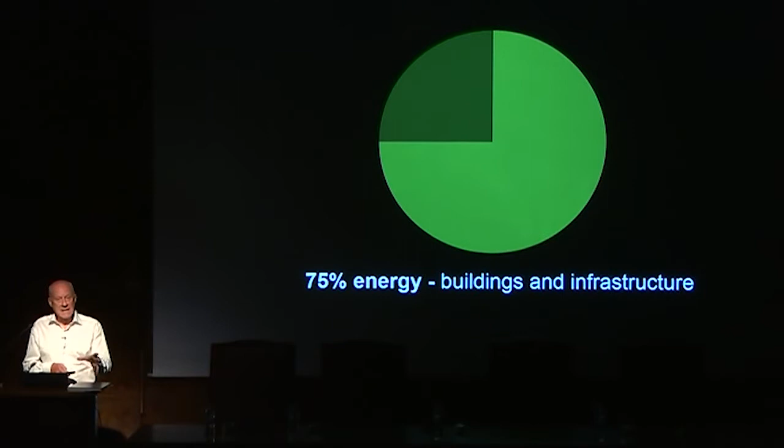So that puts simply the buildings and the movement of people and goods between those buildings. If we put the rate of urbanization into a European context, we're right in the middle of an explosion of urbanization just in China—that's the equivalent of 1 Madrid every 2 months for 6 years, just to put it into context.

And the pollution that follows from that—if you take a foggy, smoggy day in Beijing, that is the equivalent of smoking 1 pack of cigarettes in terms of health impact. Sometimes I show a very similar image of 1952 London, which claimed 12,000 lives, and that was cleared up by the political act of the Clean Air Act of 1956.

At that point in time, a small island didn't impact the global entity. But the scale of pollution now is such that in a shared world it affects everybody. It's not just national or local—it is total, global in terms of its impact.

If we look at the top and the kind of frozen waste, the polar areas, as those melt, the polar bear sitting on top of that melting mass of ice seems far away—it's not going to bother us, or is it? Because if you consider that 75% of the world's cities are on a coastline and 50% of the world population is within 100 kilometers of the coast, then really it is a catastrophe.

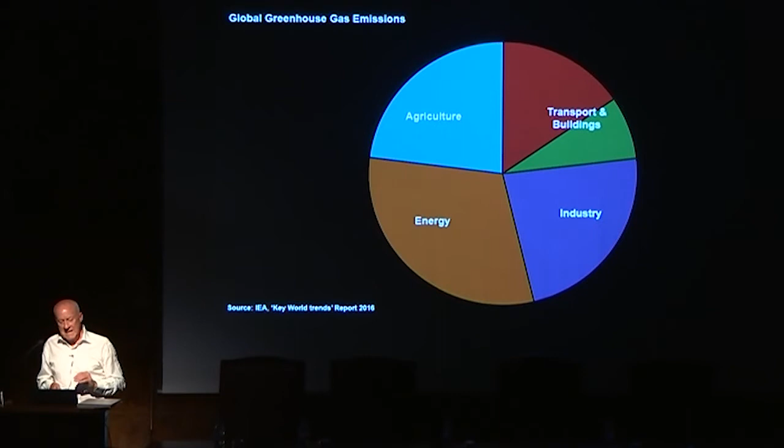The production of energy is one high generator. Agriculture, interestingly, is a very big generator, and largely ignored, with tremendous potential for change. So if we look at these elements, we have to produce energy more cleanly, and we have to produce more energy than we're consuming at the moment, if we want to address the needs of those 25% of humanity who don't have the ability to press a switch and get lights and projections.

At the same time, agriculture, and I'll come back to that later, but probably of more immediate concern to those of us in this space here, the implication of buildings, connections, infrastructure.

Looking at one example as a city typology, take the car-hungry, consuming Western United States, California. This image on the left is very typical of what you would find when I had my first meeting with Steve Jobs about his project, on the 1st of September 2009. In that conversation, he harked back to his youth, his childhood, and the fact that this area was the fruit bowl of the United States, and a demonstration of extraordinary rate of change in terms of technology, because this is now the generator of wealth, the Silicon Valley that we all take for granted.

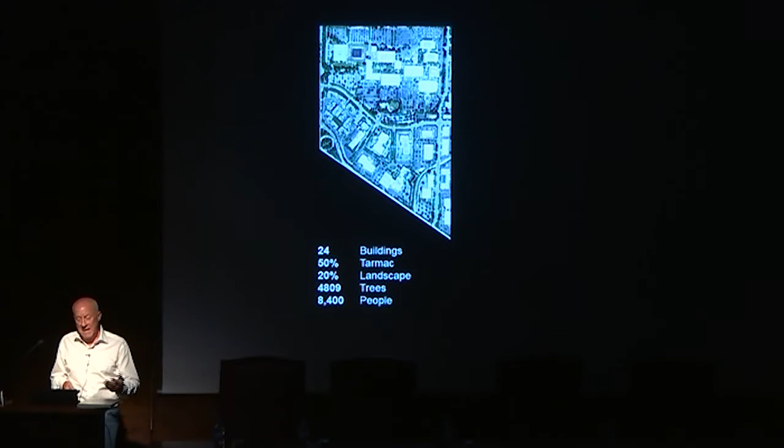So how could one weave some of these themes in terms of reducing pollution, working with nature, bringing back nature? If we look at his site, on a kind of typical highway that I showed before, it's a lot of buildings with a lot of asphalt, a lot of car parks, no landscaping, making a big leap into where we are now over that period of some 8 years. And this is the end result.

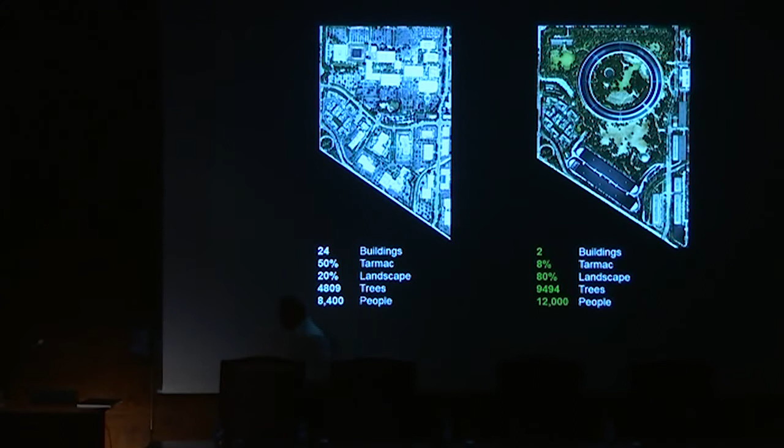The first thing that you see is there's a lot of green. It's really going back to the fruit bowl of Steve Jobs' youth. I'm just going to touch briefly on the larger building, and what you may see is the smaller circular building just below here, the big building, which is the kind of launch pad that was the venue for the product launch a few weeks ago.

So if we look at the big circular building and we see these eyebrows, if we look into the junction between those big sheets of curved glass and the kind of eyebrows that come out that deflect the light deep into the building, shade it on some elevations, then we start to see the way in which this building breathes. It's really working with the climate.

For some 80% of the year, you don't have to cool or heat the air. Of course, you have the capability of doing that in the extreme. So this building is a fresher, more healthier building. It's consuming less energy. And at the same time, the scale of the greenery - remember that the building harvests its own energy, so it's totally carbon-free and totally self-sufficient. But the greenery is absorbing something like 2,000 tons of carbon dioxide, which is a neighborhood benefit for the area.

The launch of the product, the first building that was open to the press, and therefore, by implication, the public, is the circular presentation theatre, the Steve Jobs Theatre.

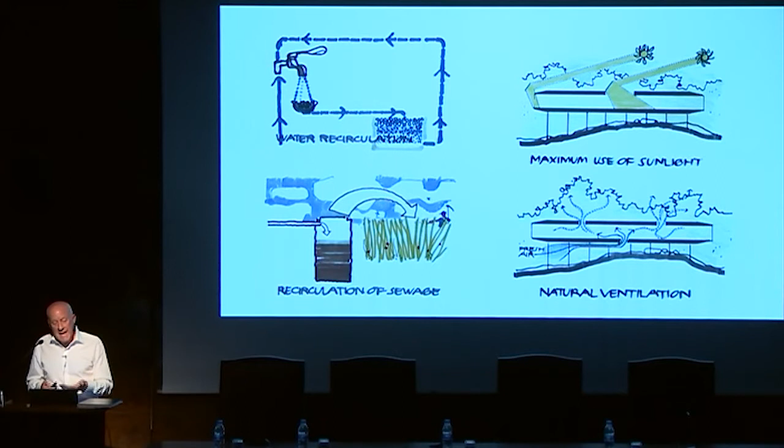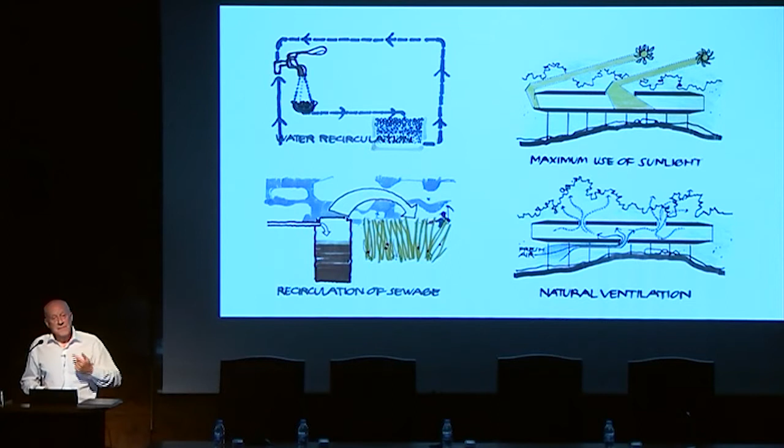As I delved deeper into it from the drawings of the past, I realized that this was in the 70s, before anybody had invented the term green architecture. This was about recycling, natural light, and a breathing building, bringing the air from below, from the cool forest floor. And it suddenly clicked that that was the clue to the reinvention of the airport at Stansted.

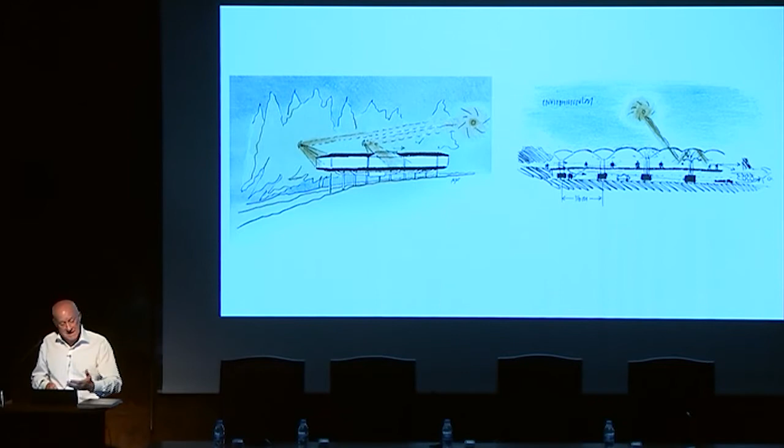If you just look at these two cross-section sketches, I realized it was the same engineer, who was an integral part of the design team, who'd come up with this idea that you could service from below. It started with this project in the forest in Norway, and informed how you would reinvent this. This was the airport terminal at Heathrow, typical of any terminal in the early 1990s, where the roof is absolutely solid, jam-packed with mechanical equipment.

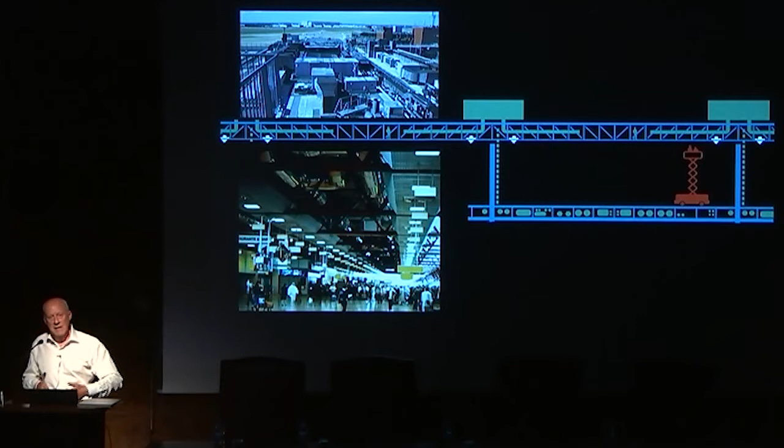Here you get working together with an engineer to zap the engineering, to get it out of the way. If you turn this diagram upside down and put all that heavy servicing on the ground, first of all it's more economic to put heavy stuff on the ground rather than up on a roof. Secondly, for an operation that runs every day of the year, 24 hours, you need to be able to maintain it without stopping the action on the roof or underneath. In the process, you bring more joy, more spiritual uplift, and you use less energy.

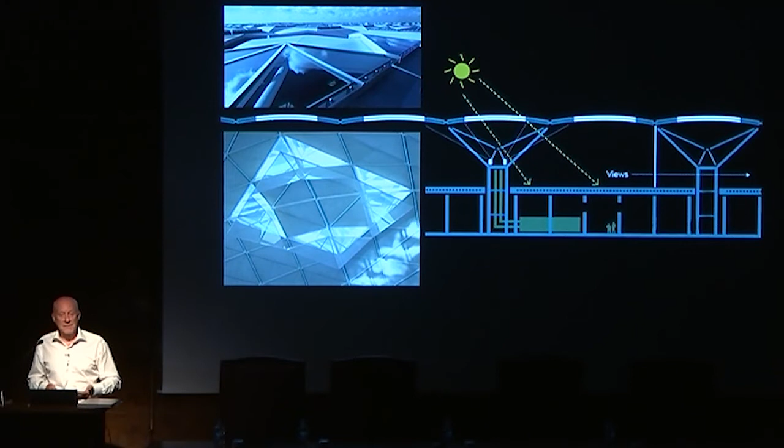You're working with nature. That was a kind of revolutionary move at Stansted, and in effect it reinvented the terminal as we know it. But you can only, as an architect, make those revolutionary moves quite rarely. They occur at points, and then you spend a large amount of time refining that model, which is a kind of evolutionary process.

So Hong Kong Airport could not have happened without Stansted. It's a development of that model, and then an increase in scale in Beijing. But they're all evolutionary. They're building on that big step that happened way, way back 20 years earlier.

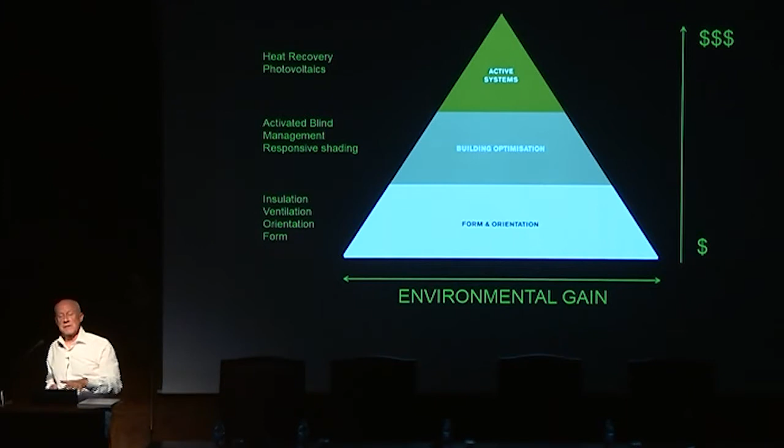But if you got the base decisions right—and on Masdar, that would be learning from an age before we even had power and electricity—in other words, how did a desert tribe create an architecture in an age before power and electricity, just using thermal mass, shading, vegetation, and water to make beautiful, cooler habitations. If you applied those lessons in an experiment like Masdar, you could achieve a high-quality environment with a small input of that extra energy at the top.

If that's true of a building, it's also even more true of the combination of buildings and infrastructure, in other words, cities. So you could say that simplistically, there are three kinds of cities.

There is a very strong relationship between the form of the city, its dependency on the car, and its density to sustainability in terms of the amount of energy consumed. The equivalent of the gas guzzler is the sprawl, the car-borne city, which is a relatively new invention and is already being called into question. The ideal model, rooted in the past, is Madrid, but it could be London, it could be Boston, and taken to an extreme in terms of high density, Manhattan, where the highest proportion of individuals can walk to work from their dwelling or arrive by public transport. So it's very much about proximity.

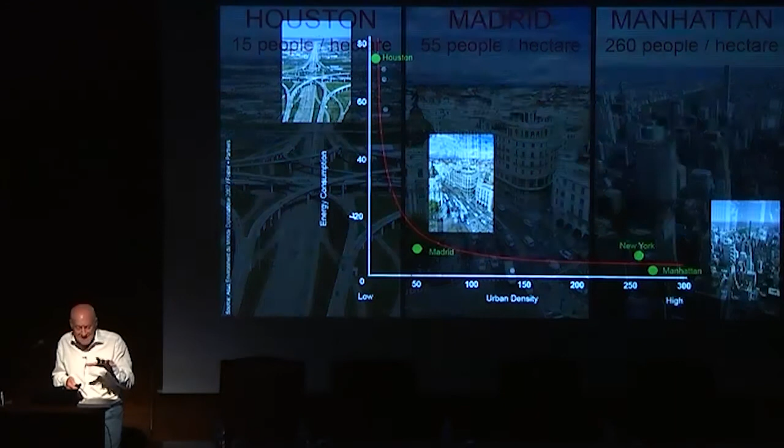If we put those onto a graph to demonstrate statistically the relationship, energy consumption is the vertical line. At the top, you're consuming a huge amount of energy. The bottom line is density - low density, high consumption. Madrid, London, whatever, comfortably in the middle, high performers, and then New York and Manhattan, but Manhattan could be Hong Kong, it could be Asian cities. So really, essentially, those three typologies.

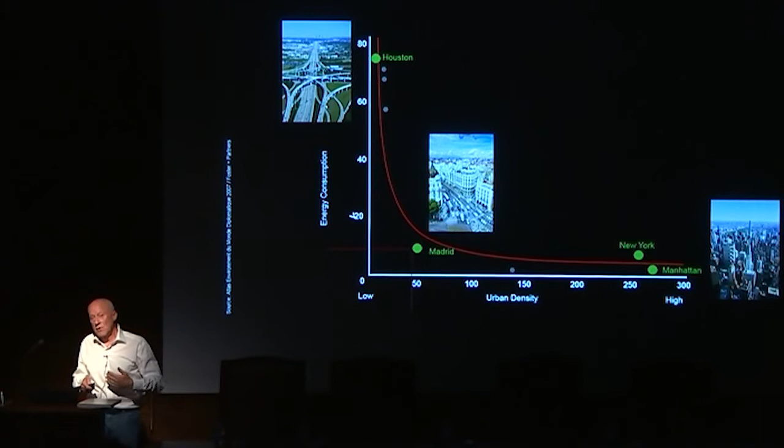You would have thought that if that was the reality, then when you had an opportunity in terms of the current rate of urbanization, you would learn those lessons of history. That is interesting because those lessons are being learned in one part of the globe and largely ignored in another. If you look at Dubai in 1991, which is relatively close, then this is Dubai now - it is the Houston model, this is what it's looking like. So whilst the new urbanizations are going in this direction, what is happening to the rest of the world who've gone in this direction and learnt those lessons?

If you take Boston, this freeway was built in 1959. In 1995, it was decided that it wasn't really doing its job, so it was ripped up, giving rise to the Big Dig. The Big Dig has produced a neighborhood where crime is lower, real estate values are higher, and the quality of urban life is significantly improved.

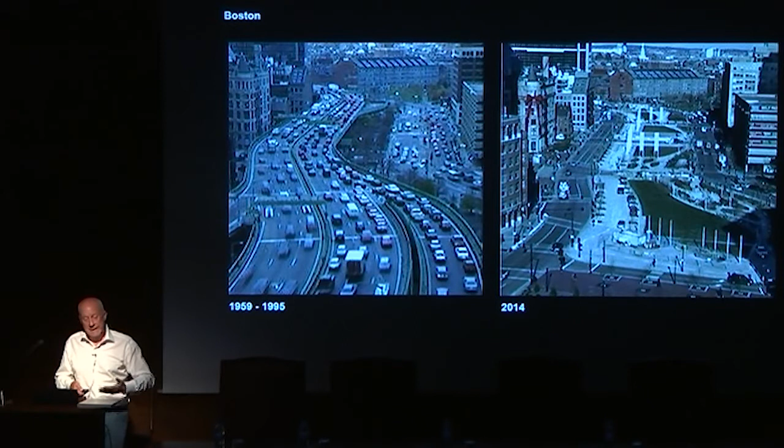If you go to Asia and look at Seoul, they buried a river in 1956 in concrete, and then in 2014 they took it all away and brought back the river. And even here in Madrid, in 1960 a road was built next to it - now it's a pedestrian experience.

So in a way, there's a huge gap here and a need to feed those lessons from one part of society to another emerging part of society.

Interestingly, this is happening at a point in time with the transportation revolution, whether that's Uber or the automated car. What does the automated car do when it has the potential to produce a train, where the car can be nose to tail with the next car, flowing in a line? And to what extent does that challenge some of the assertions I made about suburbia? It has the power to totally transform mobility as we know it.

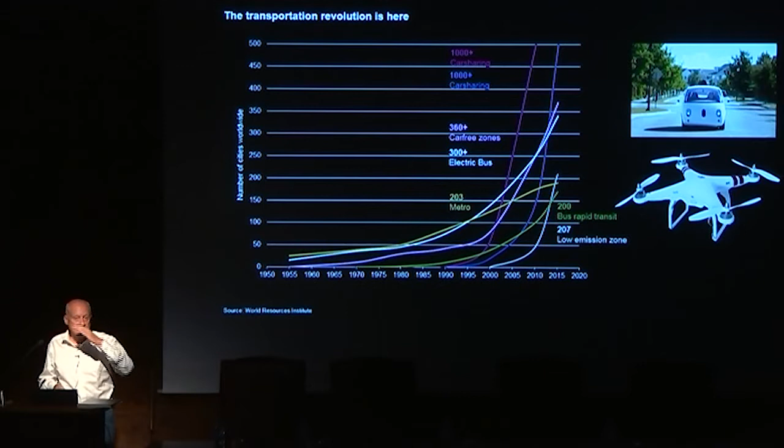Already the drone is a fact of life in terms of recreation and photography - we've all been able to follow the progress of Apple's site by drone fanatics who fly over and capture it. But when those become passenger-carrying drones, look at some of the Airbus explorations, where you could have horizontal and vertical mobility. So really the challenge is doing more for less, and performance.

What are the lessons from this that need to be fed into the wider picture of societies? Coming back to that point about power and electricity, as a reminder, a quarter of the planet's population doesn't have access to that power. What are the lessons we might learn from the world of communications in terms of addressing these issues?

This is in Rio, and literally one side of that wall is the equivalent of here. The other side of that wall, the next image - not in that favela itself, but it could be - shows this extraordinary ad hoc plugging into power transmission.

In a way, already perhaps that concept of transmission is being questioned—the idea that we have to move energy by cables. We've demonstrated in the Masdar experiment that a solar field below of 10 megawatts can power a very energy-intensive university exploring renewable energy 24/7, without any mains transmission. And perhaps by miniaturizing, snipping pieces of that very large solar field and distributing them locally through rural communities, you could provide the quality of life that the city offers in rural areas, reducing the flow to the cities and getting a more balanced approach, as well as improving quality of life.

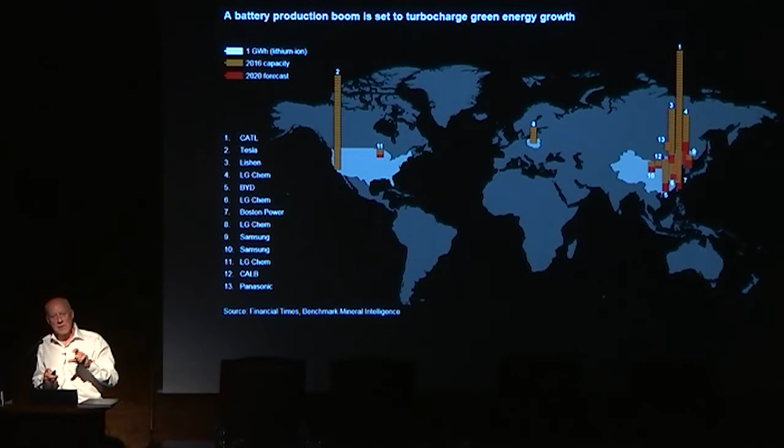In a way, you cannot separate the issue of solar from the problems it poses, because when you most want that energy, the sun isn't shining, most likely. So that is related to investment in battery production and increasing the performance of batteries.

It's common knowledge that the biggest investment is Elon Musk's Tesla in Nevada, shown on the left. But by comparison, you can see the biggest investor is China—that's where all the effort and research is going into a greener future.

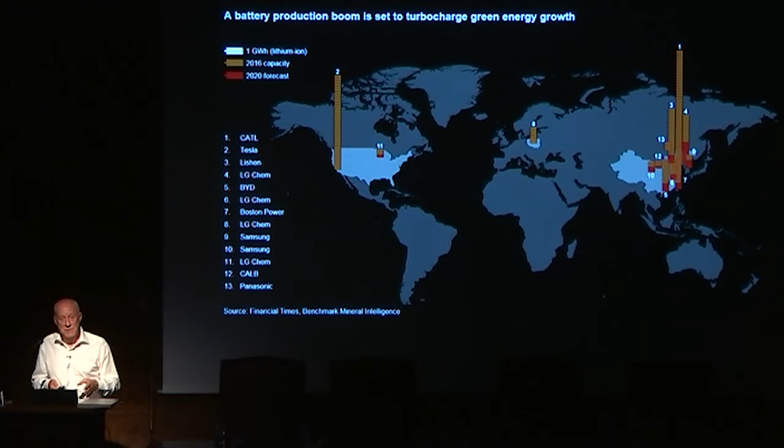What happens when it all goes red? That's an interesting question. The answer is that, in terms of efficiency versus consumption, we have to do more with less. So what are the lessons from other fields? Maybe we don't have to have heavy transmission lines—maybe we can work locally, harvesting energy instead of relying on mega plants that distribute it.

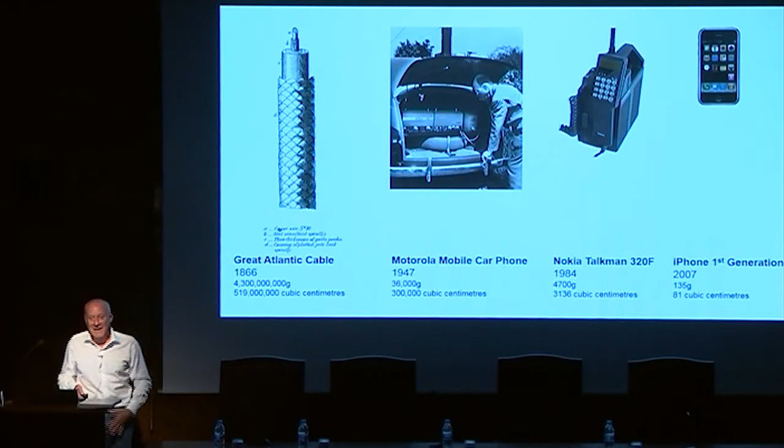If we look at the Great Atlantic Cable from the 19th century, which weighed billions of grams, and fast forward to 1947, you can see all that capability fits in the trunk of a car. Then there's the Nokia, and looking at the date, it's 1984—I remember being one of the first people in London to have a mobile phone, carrying it proudly into meetings and putting it on the table. Now the handheld device in my pocket does more than a room full of that stuff, not that long ago, within living memory.

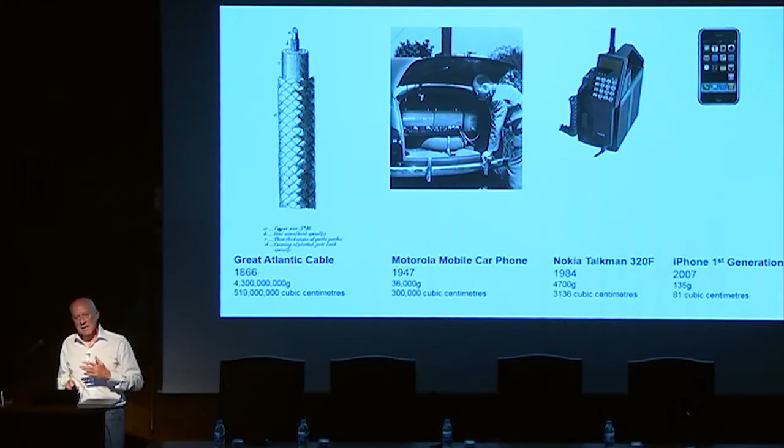So the hope is that if those lessons are fed back into some of the issues in the world I've described, we can really seek to do more with less, using ingenuity.

I find it tremendously encouraging that in an ideal world with developed transport infrastructure, the Metro Bilbao can really go underground. But for some communities, they will never have that luxury, certainly not in an emerging phase of development—and to do this is at least 30 times more expensive than just building a highway.

But Bogota, with an incredible mayor and political leadership—who also had a background as an architect—decided that if you combined the bus, the highway, and the lessons of mass transit, you could issue tickets earlier, give dedicated lines, and redesign the relationship between a platform, a bus shelter, and the movement onto the buses.

That initiative reduced traffic fatalities in a measurable period by 93%, cut air pollution by 40%, shortened commuting times by 32%, achieved overwhelming acceptance, and moved something like nearly 2.2 million people a day.

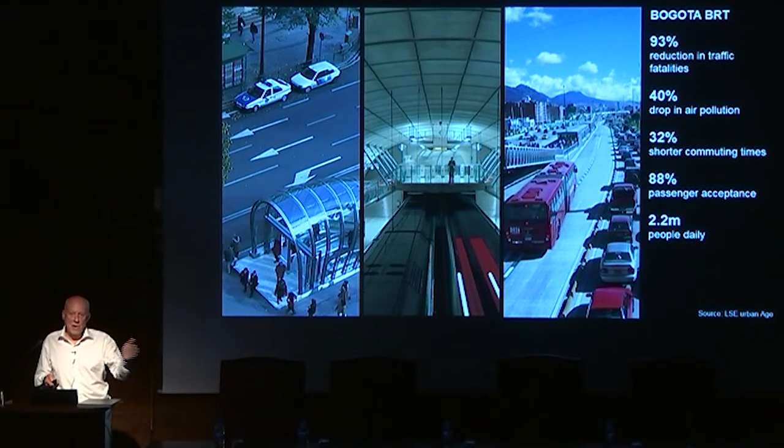To try and sum up, we have to move as communities. There's a very interesting book, so interesting that I organized for every individual in the practice to have a copy. It's called A Climate of Hope, by a friend who started as a client, Mike Bloomberg, who with Carl Pope, head of the Sierra Club, wrote this book.

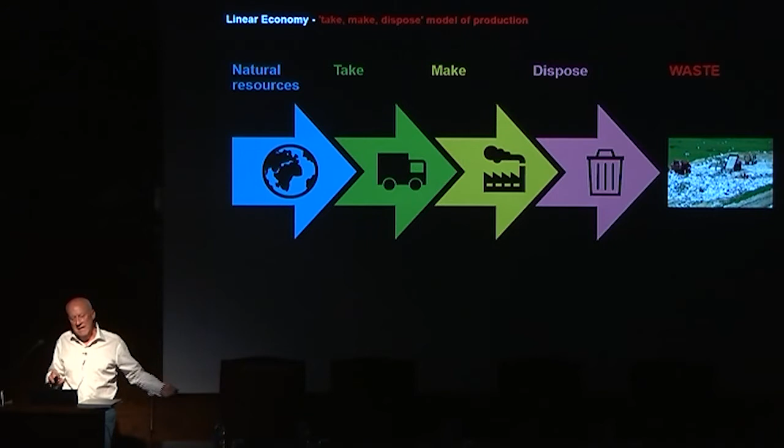The thesis of the book is that we cannot wait for governments—they take too long. We have to move as cities, civic leaders, and citizens, individuals. The move has to be from a linear economy, whether national or city-based, away from the idea that we bring stuff in, consume it, and spew it out as waste, to something much more circular.

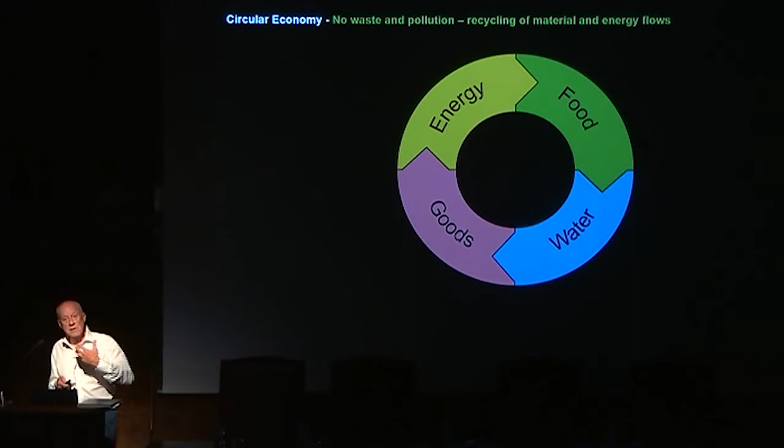We have to look at the relationship between waste and energy, the idea that you can burn the waste to produce energy, and the whole question of agriculture. Think about the traffic revolution, the move to electric cars, already a fact, already in legislation in India, in London, in various countries—the end of the internal combustion engine for cars will linger but it may transform. Once you do that, you take away the byproduct, which are fertilizers.

So why, in that scenario, would you ever think about agriculture being out there in the middle of nowhere? Because there's no fertilizer any longer, and you have to move all the water out there, which is going to be a very precious commodity indeed. When you're in the city, what do you have? You have all the waste, which is fertilizer, and the water that goes with it.

So you could imagine—here we're seeing hydroponics. It's a vertical farm, an urban farm. With hydroponics, for the same area you can get 13 times the yield while consuming less than one-tenth of the water needed, so you're conserving water. I think there are some very exciting developments. In that sense, we called it 'The Future is Now.' You can already see those symptoms.

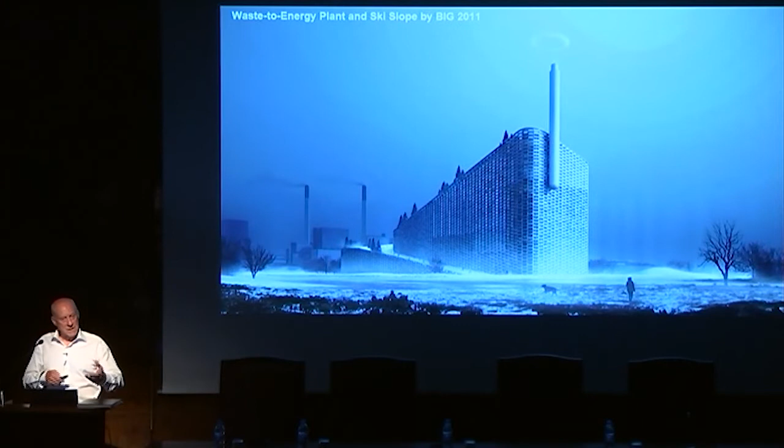And here, again, by Architects BIG, the idea that a waste-to-energy plant becomes a ski slope—looking holistically at the relationship between activities.

So finally, cities can change the world for good, and small changes can make huge differences, and the answer has to be design and technology. If technology got us into some of the messes we've been in in the past, it's technology that's going to get us out of it.

It's interesting—at the end of the 19th century, London and New York were going under in horse manure from horse-drawn traffic. You had the equivalent of the two-seater cab, the hansom cab, and the equivalent of trucks, the buses—all horse-drawn. The two cities were literally going under in waste. Within a decade, the cities were clean. Still traffic jams, but the saviors were Henry Ford and Benz, the motor car. So the motor car, now questioned in many ways as the enemy, was the savior at the end of the 19th century.

So it is this idea of diverse skills acting together. No one profession can really solve some of these issues, and that's very much what the foundation is about—multidisciplinary working. It comes back to the political domain, civic leadership, the idea of communities, civic leaders, progressive change. So cities are the future now.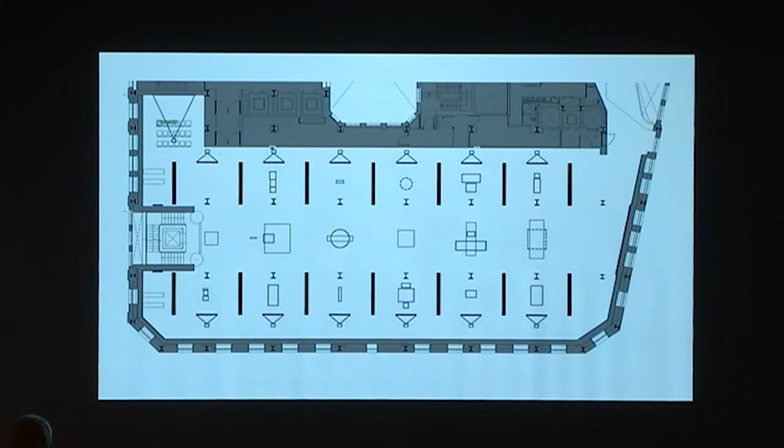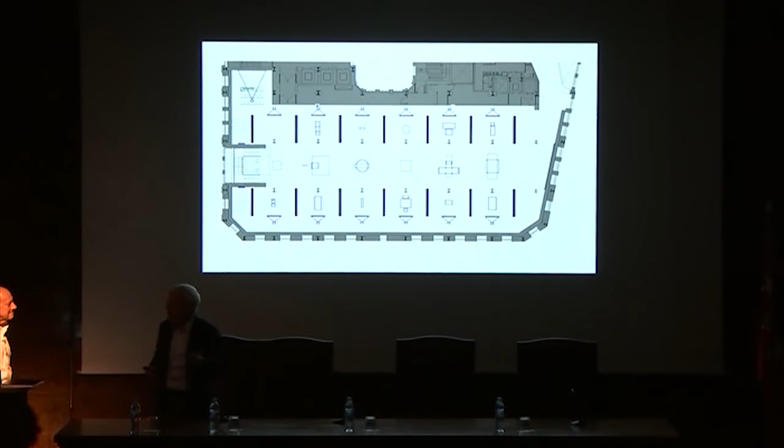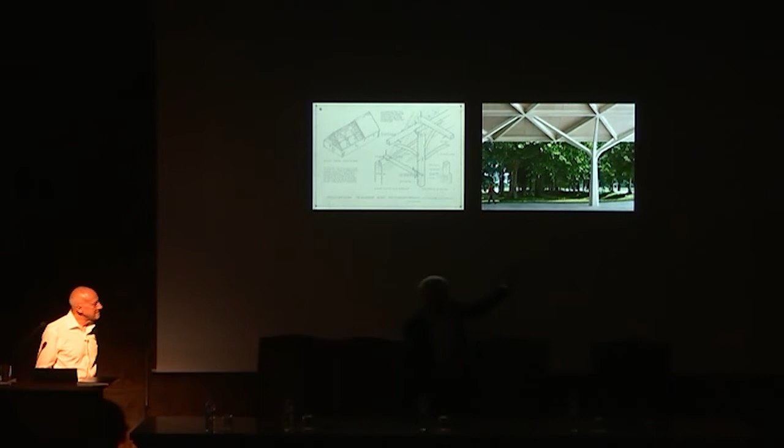The organization of the exhibition is simply a main nave and 12 chapels, and each of these chapels explores a version of the future, with one project of Norman's which is very recent, and another which comes from his years, sometimes even from his years as a student. The first of the chapels, and this is where he starts discussing, joins drawings made by him as a student of vernacular architecture in 1958, and one of his latest projects, the winery of Chateau Margaux near Bordeaux. Somehow 60 years of difference, and a conducting thread from this exploration of vernacular architecture to this, which is perhaps the more organic of your recent projects.

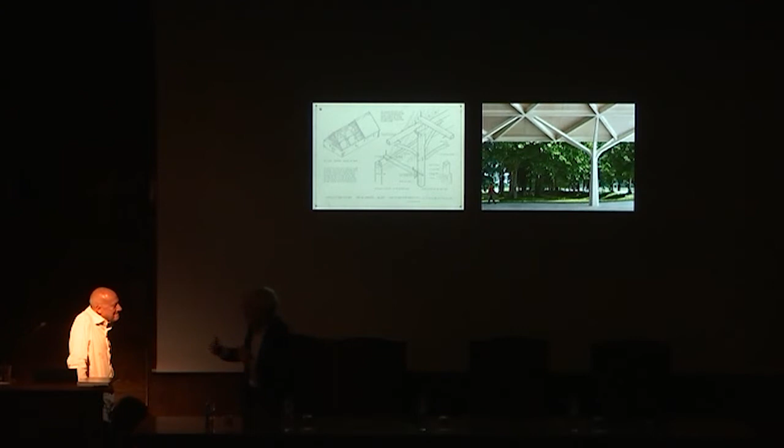So I'm just going to go through these 12 dialogues and ask for Norman to make some remarks. So the first one, here you are.

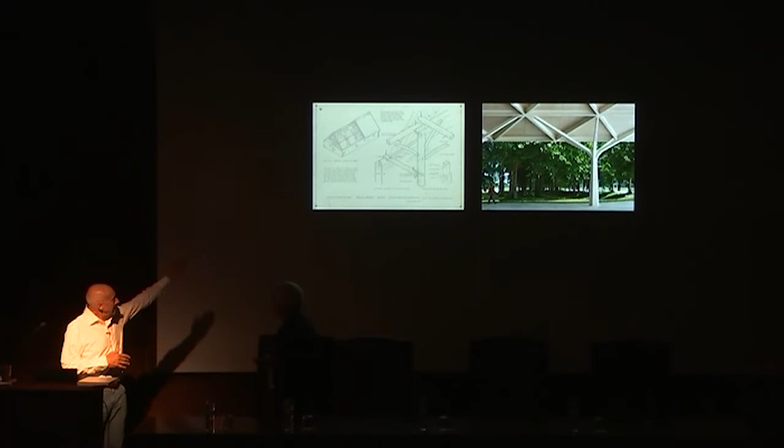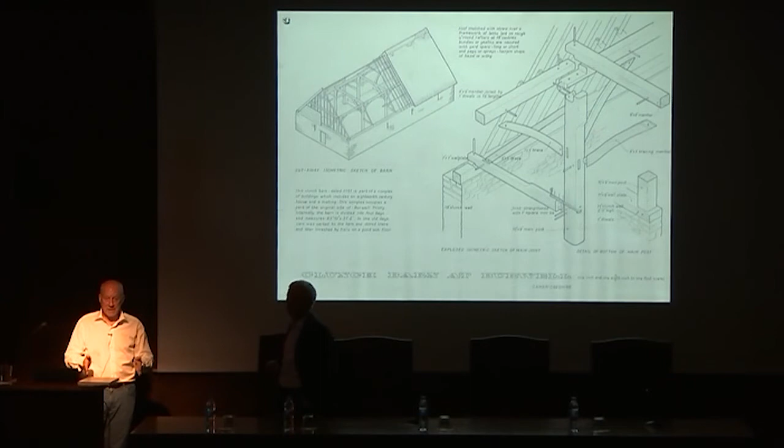As a student, I would perhaps protest some of the rituals that at a very traditional school like Manchester I had to go through. One was doing the measured drawing in the summer. The challenge was that you had to take a building, crawl all over it, measure it, make notes, and then when you'd done that, you went back home. This was a trip to Cambridge to measure a barn. The first thing that was different is that nobody had ever chosen an anonymous building. In the past, everybody had chosen Georgian buildings. This was not considered architecture. So already I was kind of out of step as a student, because for me, this was really interesting architecture.

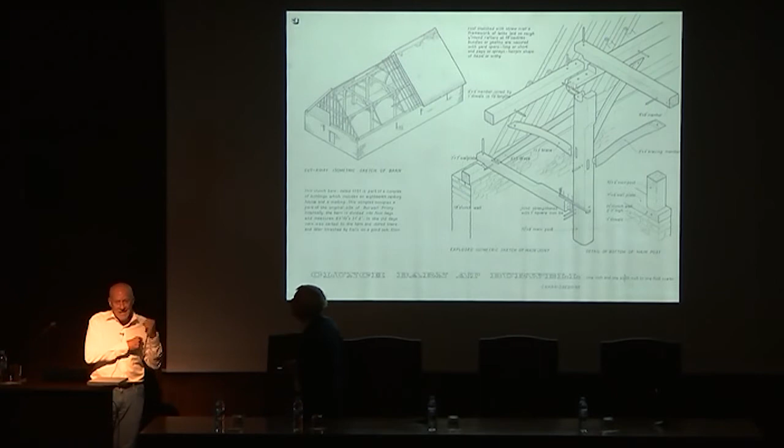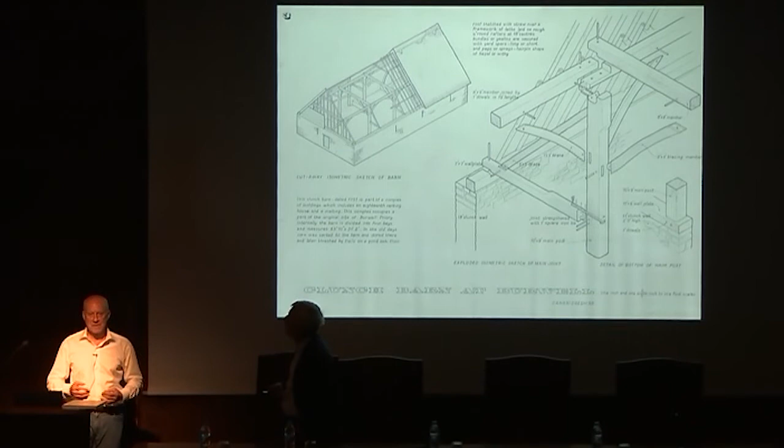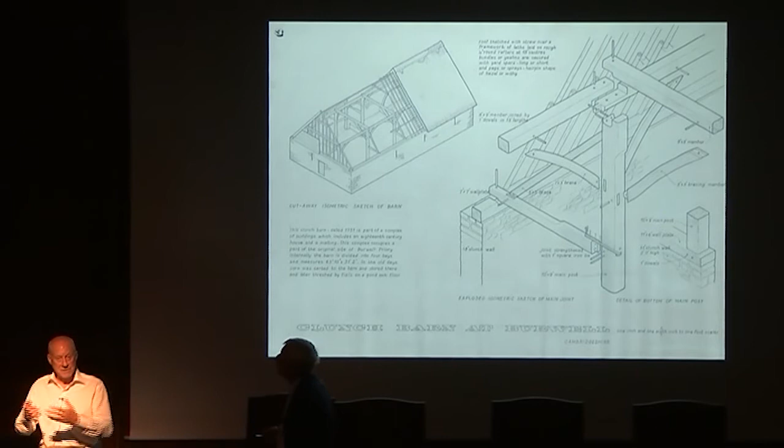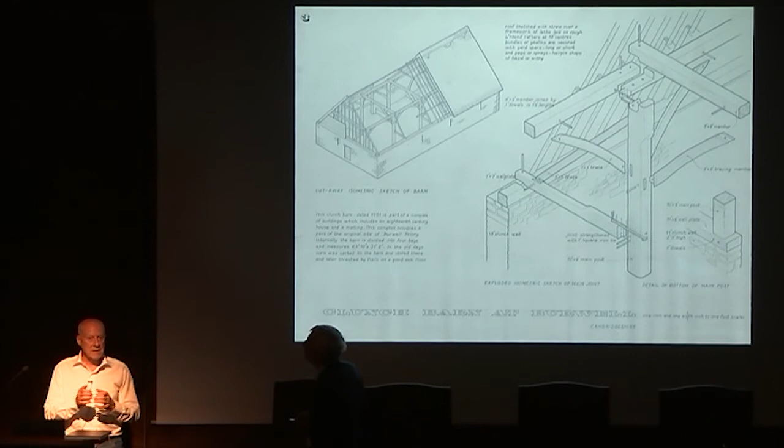It didn't mean to say that I did not appreciate Georgian high architecture. Of course I did, cathedrals. But it seemed to me there was a whole range of buildings. Then the act of having to go away, and that's it—you only got one shot, unless you were rich enough to go back and measure something you'd forgotten, which in my case I couldn't. So you then had to construct measured drawings. I elected to do them again, first time ever, three-dimensionally. Normally they were just done as plan sections and elevations. This is how it's shown in the exhibition.

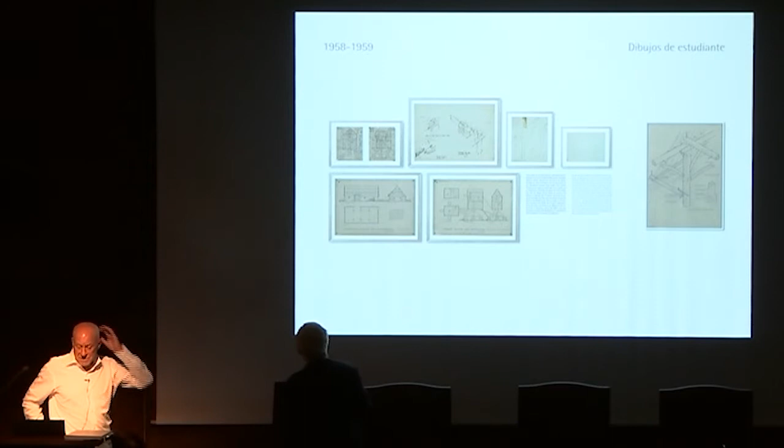So in a way, Margaux, when given the challenge of adding a new building, everybody expected that would be an opportunity for a great celebration of some amazing modern new building that would contrast with the agricultural buildings. I want you to imagine Chateau Margaux. It's an 1815 chateau, it's the jewel. A long avenue of trees leads up to it. All to one side are fairly noble, anonymous, big-roofed, tiled buildings. And I made the decision that really the protagonist was the 1815 Palladian-inspired villa.

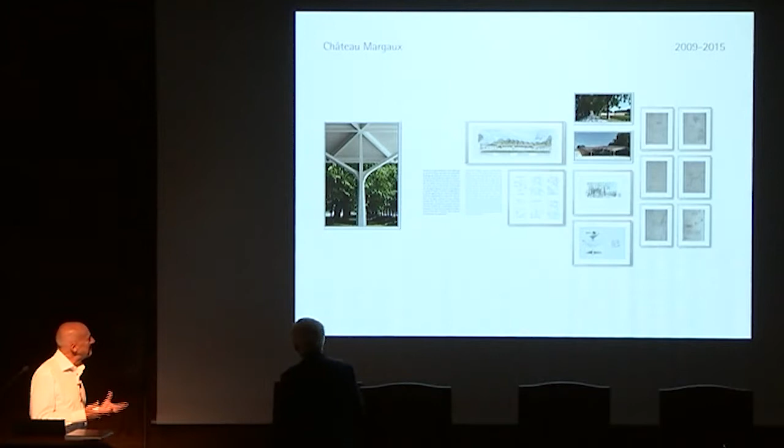And that this was an opportunity—I suddenly saw it as an opportunity to do something that was totally contemporary. It was a big roof. I found, going round the estate, a number of ruined buildings where you could take the tiles and create another roof, and underneath that would be a very, very elegant steel structure. Then you could change everything under that roof in the future. And of course, this as a tree is evocative of the trees in nature. The nicest story, and for me the ultimate compliment, was told to me by the late manager of the estate. He said he came across a total stranger wandering around the estate and asked him what he was doing, and he said, 'I heard that there was a new building, but I can't find it.' So this was the future of the past, and how vernacular architecture could fertilize contemporary works.

Now we go to the future of culture, and we compare a work of yours near Nîmes, in front of the Maison Carrée, and of course the project for the Prado Museum. Yes, and the little project in Nîmes, which is next to the oldest surviving Roman temple, beautifully preserved, is very much about engaging with the city.

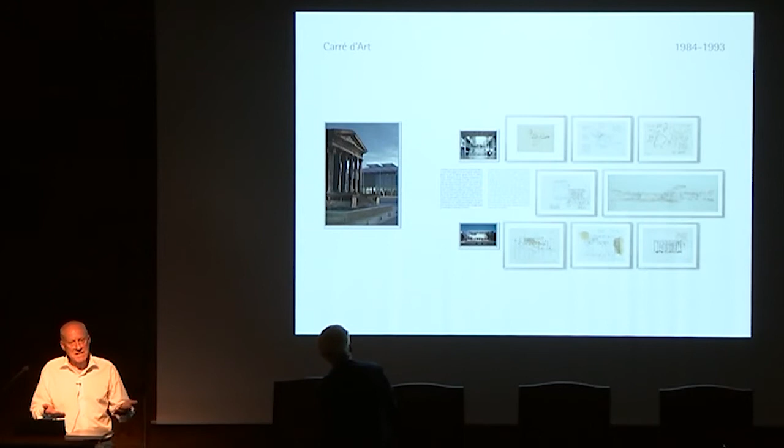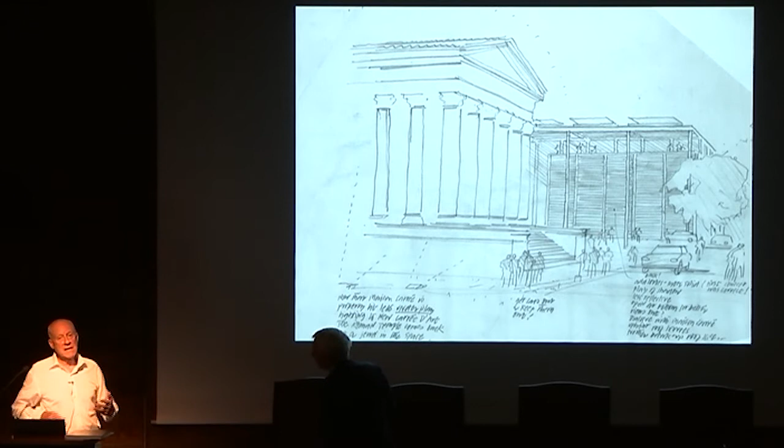So it takes the classical traditional device in steel, but of a portico, which really is reaching out to this tiny city and breaking down the barrier between the infrastructure, the public spaces of the city, and the more private inner spaces within the building itself. And that is taken to a further degree in the proposal for the Prado.

And the team behind that is here today, and will recall the struggles that we had. In the end, we said, let's present one scheme but with two variations. One embraces much more the city. So again, those themes over time, coming out looking completely different, as you'd expect. But the principle is the same.

Now, the third dialogue, again, between the very recent completion of the Bloomberg headquarters in London, Bloomberg that you have mentioned as the author of the book that we all must read, and of course a building from the first part of your career.

Yes, well in a way the Willis Faber and Dumas building was against all expectations. It was an office building, so everybody expected that on that site we'd do a tower. Against everybody's expectations, what we elected to do was follow the geometry of the street, albeit with a suspended glass wall, which was absolutely revolutionary at the time, but to recreate the streets and create a building that was low. So you would come across it more by surprise, coming through a street, seeing a glimpse of a building, and then you'd have big floors, and you would rise up between those floors in natural light through escalators.

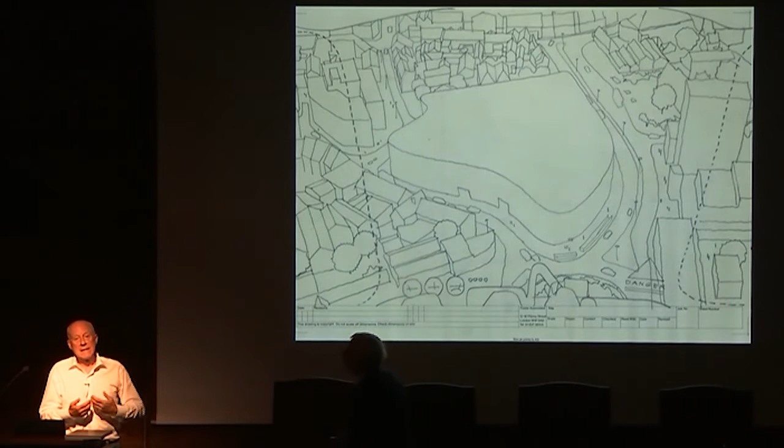It would have a green roof, so it's very much about lifestyle. There was no swimming pool at that time, so it had a swimming pool, again unique in terms of creating an office building. And Bloomberg builds on that.

Willis Faber was an energy efficient building in its day. Today it wouldn't be, it would still be a high performer, but this is a much higher performer because it's a natural breathing building. The principles I was talking about on Apple, but much, much more difficult to achieve on a congested urban site with a lot of exhaust fumes, pollution, noise.

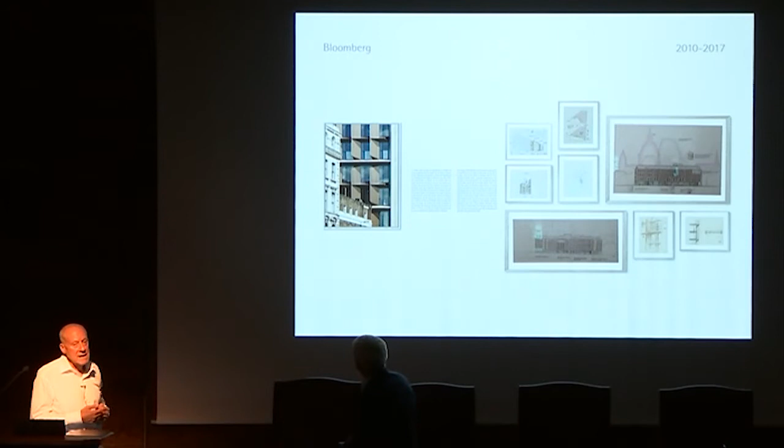So the facades are like the gills of a fish. That enables the building to breathe. That's normal in a very shallow building, but to do a deep building and to pull air through and to have a healthier environment as a consequence, aside from the implications in terms of energy - that is, again, a progression, a development. That would not have been possible, incidentally, to do at the time of Willis Faber.

I think the ability to compute a model and to be able to predict - although, to enable this building to be built, we built a huge portion of it in a warehouse as a test facility and monitored it in real time, as it were.

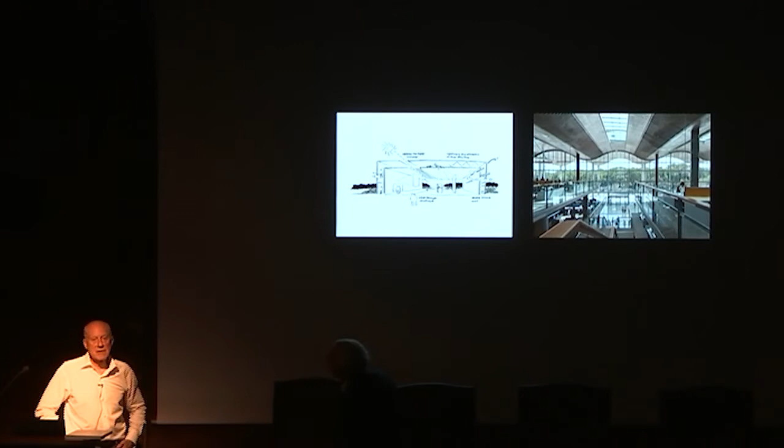And then a dialogue about flexibility and how buildings can join. Yes, the building on the right in Buenos Aires - the then mayor, who's the president now, Mauricio Macri, to regenerate the city, proposed different zones. And the zone where this building was designated was a technology zone.

And by a number of devices, that being one of them, the other being the insertion of a higher quality of public transport. When we started this project on site, it was a no-go area. Visiting it on a site visit, we were advised not to get out of the car. Now it is totally transformed.

So that political policy, together with the insertion of a key building - and the competition was for a bank headquarters. In between the start on site and the finish of construction, the administration did a deal with the bank, and it is now the town hall. So as Luis says, it's amongst other things an example of flexibility, the ability to be able to recycle a building for a completely different use.

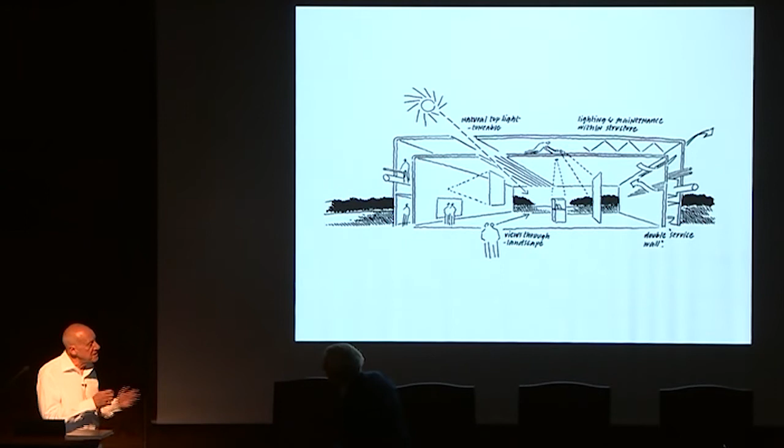And the Sainsbury Center, again, was about breaking down barriers - breaking down the barriers between the public who would come to see a permanent collection and the School of Fine Art that would teach the history, the appreciation of fine art. So all under one roof instead of several different buildings, which was initially expected. So the ability under a roof to have different activities and to be able to interchange those.

Now, a dialogue between something you did - now you should change it, because now you have suggested a better dialogue for Apple than the original commission of Olsen, which is a second commission by the same client. Yes, I mean here we could modify the exhibition to take into account the changes which arose in my talk.

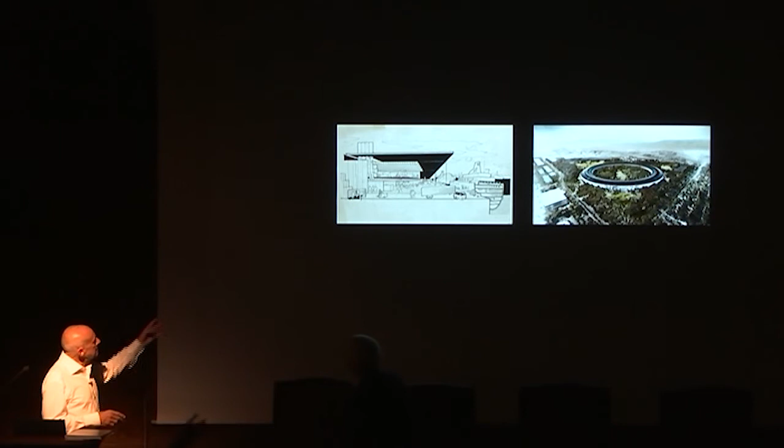Olsen is still valid next to Apple because, in a short time, it's difficult to explain Olsen, but it was about bringing together the workers, the dockers, and management, and demonstrating that they could come together under one roof. And that was in the 1960s, against the kind of cultural climate. So it was a tremendous achievement.

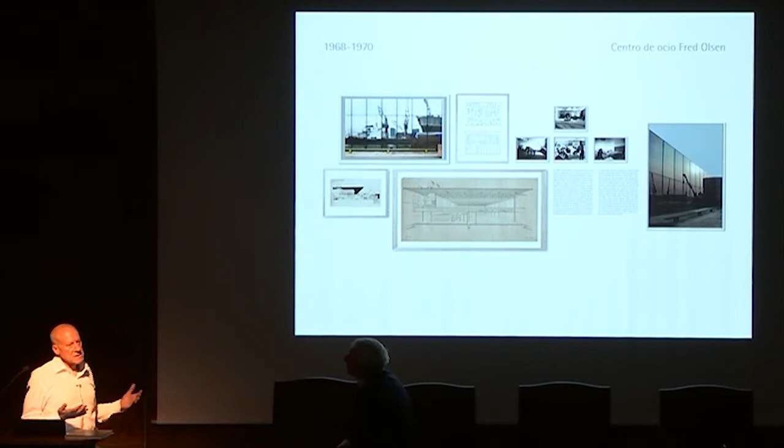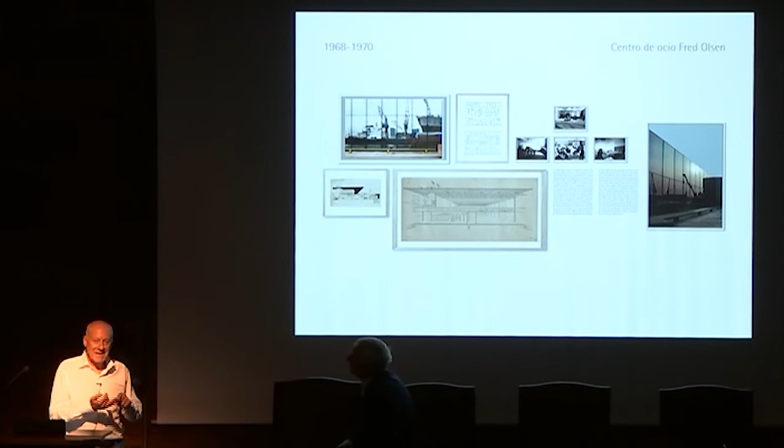It was only achieved, I think, by my being able to wear three hats. The first was that I was elected as the representative of the unions to liaise with management. I was elected by Olsen's to represent Olsen's in negotiations with the unions. And incidentally, I was also the architect, with my colleagues, of the building. But the building only happened because I was able to perform those other roles.

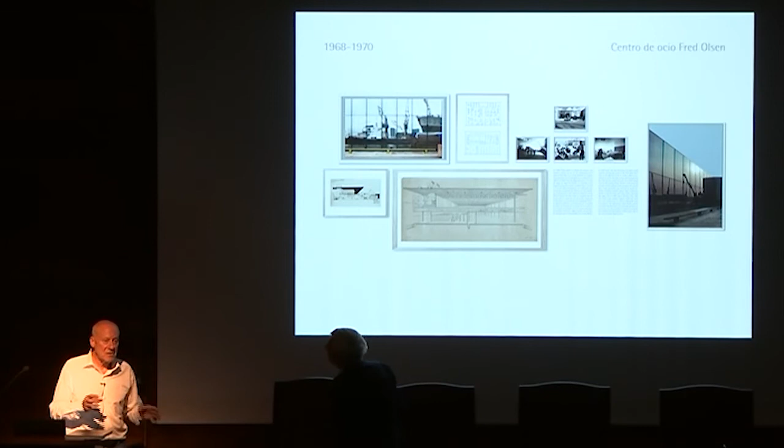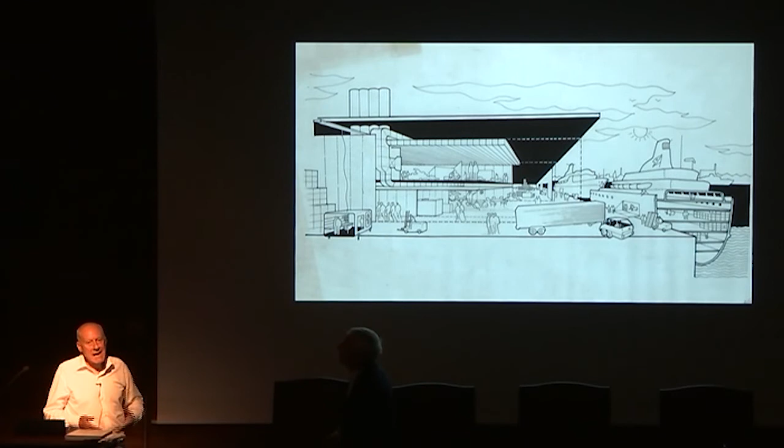The common thread between that and Apple is that it tried to demonstrate that it was about a lifestyle. So the dockers not only had, for the first time, decent showers, decent food, decent cafeteria, they also had games. They had table tennis, billiards, darts. So it was very much about lifestyle.

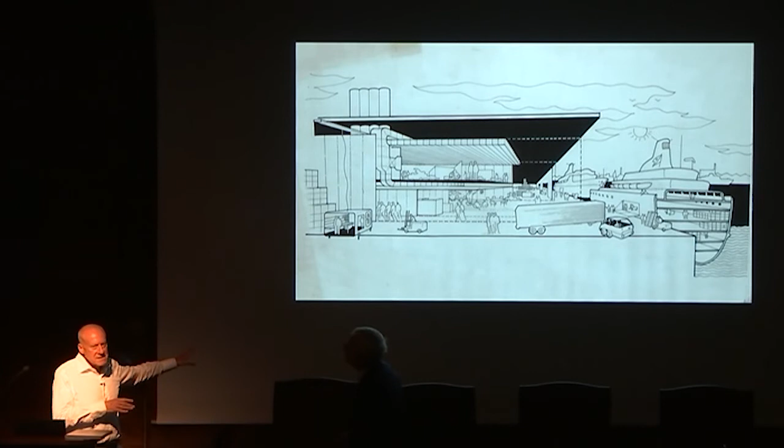In the same building, the office workers were on carpet. This was unheard of — nobody had ever been in an office with carpet before. There were works of art on the wall from Fred's collection in Oslo. So it was about lifestyle, and of course that's the 60s, and that was unheard of. I mean, it would still be quite radical even today. So Apple, in turn, it's about lifestyle — more than just the 9-to-5 activities.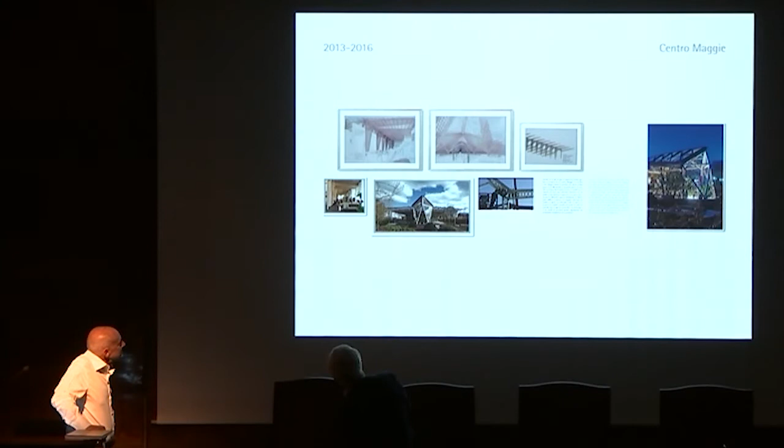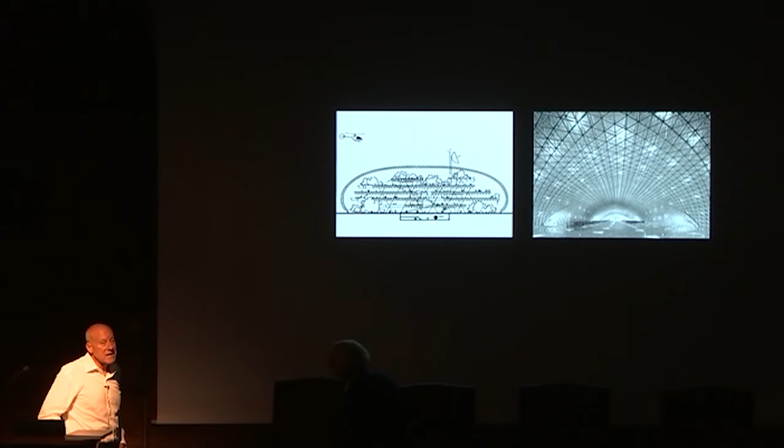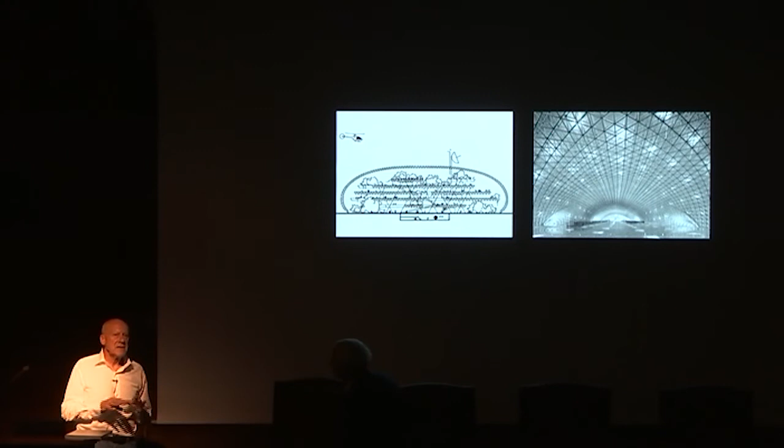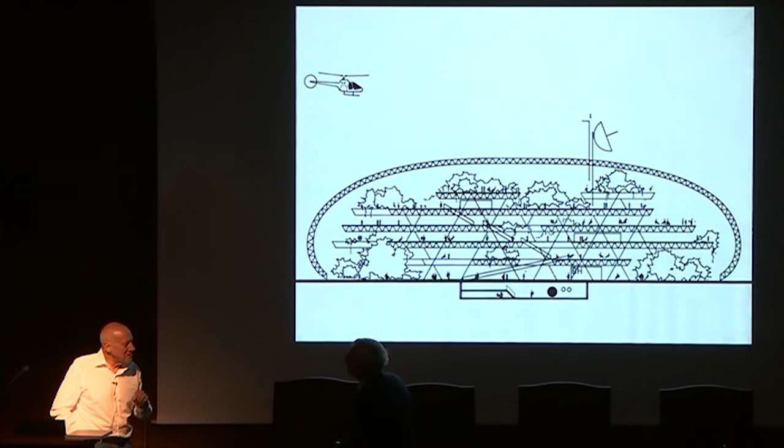And of course you have... I've really already talked about this. This was a kind of visionary idea which we call climate office — the idea that at some point in the future you'd be able to create very, very large enclosures. Now, of course, Bucky at this time in the 70s had already demonstrated that. I remember doing a sketch of Willis Faber with that very amorphous shape. I still have that sketch in a sketchbook in the foundation, and it says: one day we may be able to do this, but we don't have the technology or the knowledge now. And I say something like, maybe in the future.

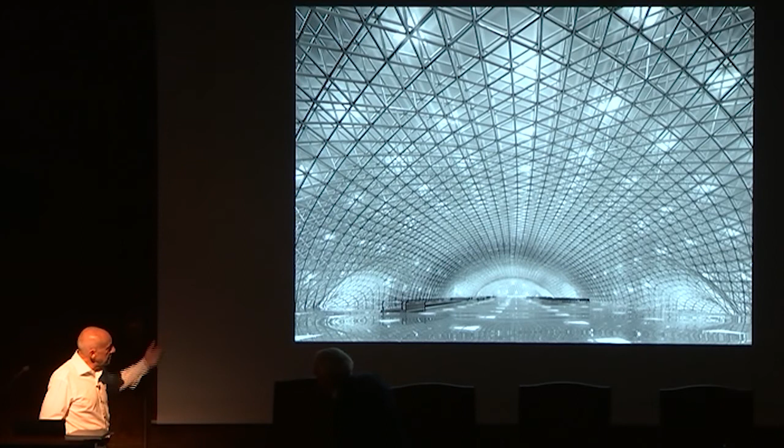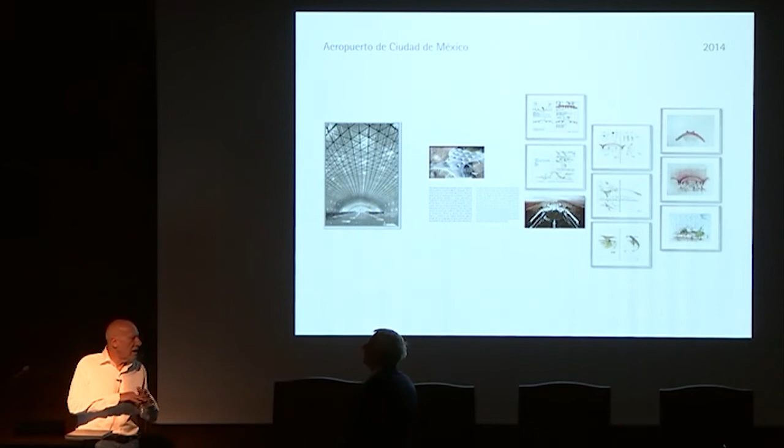In the idea of the drone port, which are remote communities on a continent that doesn't have good infrastructure of transport, doesn't even have decent roads — the idea that you could use drones, new technology, to transport urgent medical supplies swiftly and economically over long distances, and leapfrog the railways and roads which are still to come, and create a building typology that would enable local communities to work with the raw materials around them with a small additive — using the local soil. And that same principle applies to the lunar habitations.

The idea is that it's very, very expensive to transport stuff into outer space. So essentially you're taking a robot and using the Earth — or the regolith, the moon dust, which is all around you — with an additive and a robot. So one is deliberately labor intensive here, and the other is robotic, because really you want to create the dwelling and then get out and use the dwelling. So some interesting common denominators.

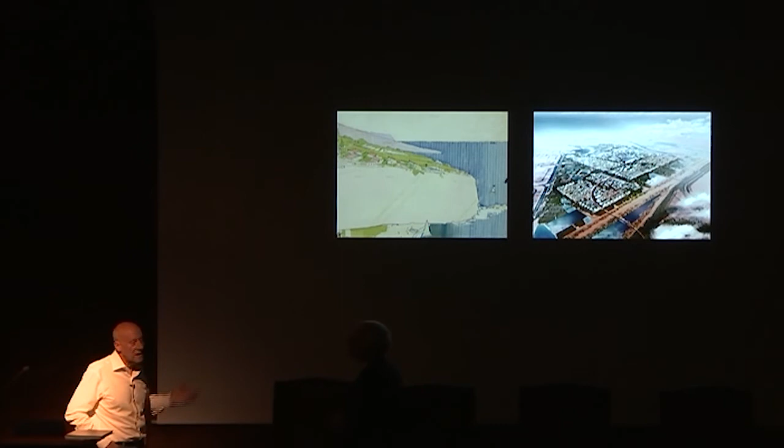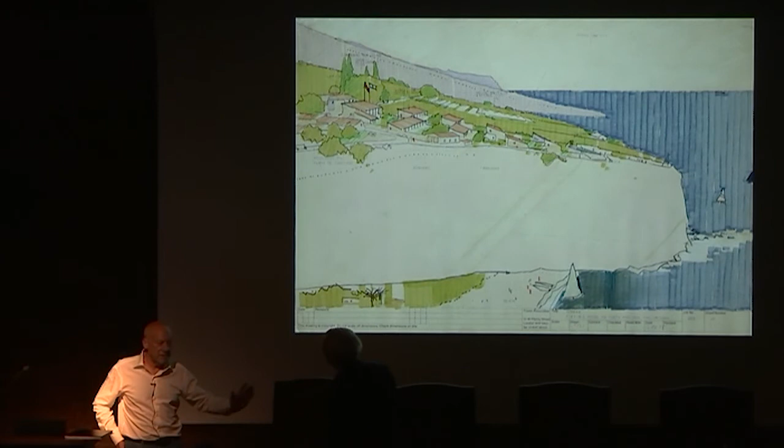And the future of sustainability with this plan of La Gomera, also with your client Fred Olsen, from the 60s, from 1965, and then Masdar. Gomera was interesting in the learning from the past. As a kind of mountain in the middle of the island, you'd have the prevailing winds that would build up clouds, and it would precipitate rainfall on one side, pitch roofs, the other side sunny. So even on an island, two kinds of architecture responding to the microclimate, which is a pioneering sustainability study, that is of course echoed in Masdar, which we've already discussed.

And then the future of networks and communications, with another Spanish example, the Collserola Tower in Barcelona, built for the 1992 Olympics, and your sadly not built airport and infrastructure in the estuary of the Thames River.

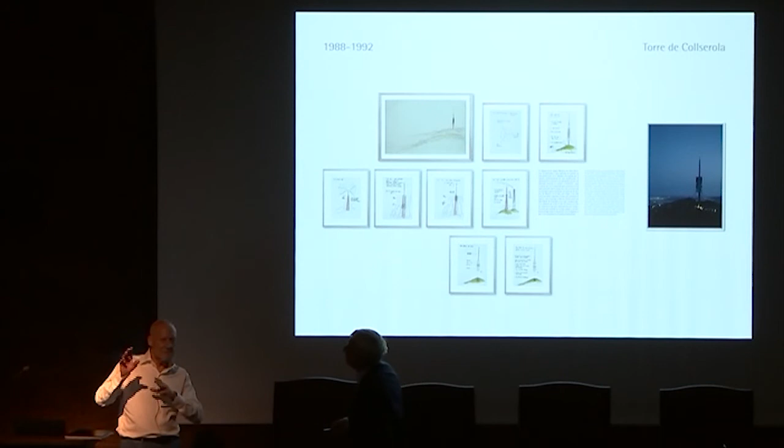Yes, it's easy to forget that the Collserola Tower came out of a political act of courage. Pasqual Maragall, the mayor, mounted a campaign culminating in a competition for a tower. But what this image doesn't tell you is that before there were towers everywhere, and the prospect of even more, everybody having their own little tower. It was an act of tremendous political courage for this mayor to say, we're going to take all those little towers down, get rid of them, they're an eyesore. We're going to have one tower for everybody. That sounds very easy, but in a real life situation where you've got one monopoly wanting their tower and another, to say you're going to have to inhabit the same tower...

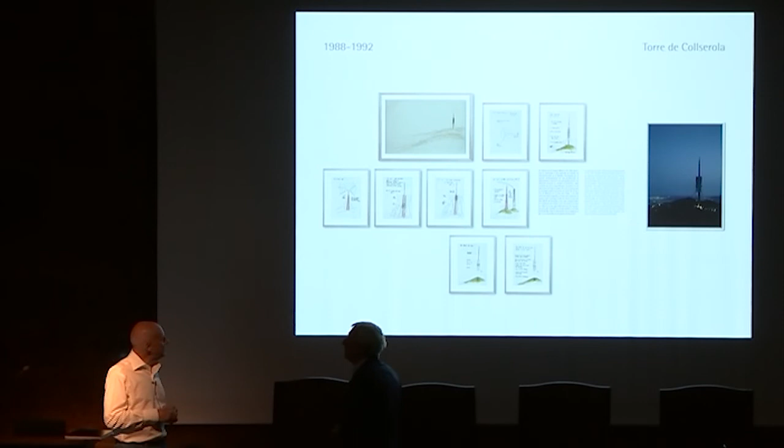I think there are political parallels, perhaps, in a very visionary proposal that sadly was not accepted by the government of London. My own prediction is that the idea that a capital city like London is overflown daily, nightly by traffic, and that it's got nowhere to go—it's a very current British tradition of make do and mend. I think it's absolutely inevitable. It probably won't happen in my lifetime, but at some point in the future, I guarantee that some version of this will happen. I think it's absolutely inevitable.

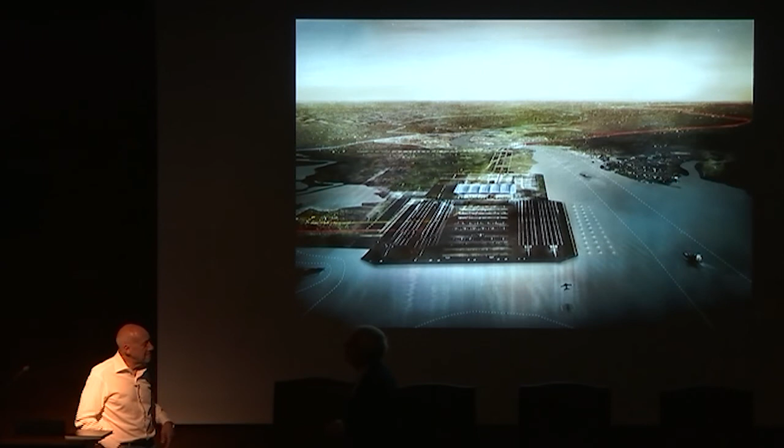You have already built an airport on sea? Yes, in Hong Kong. But in Hong Kong it was fairly no big deal to knock down a mountain and make a big site, connect it with a railway.

And finally, the last chapter of the exhibition is the future of the future, taking your first project and one of the last, and all the affinities and kind of links that we talked about together in the last hour or so. I think one of the brilliant moves of Louis was to use the structure of the 1929 building, done by an American engineer I believe with Spanish architects, and to use that structure as it marches through the space to, in a way, be a kind of framework and reveal that.

So I think it's a celebration of the building itself and Telefónica's foundation in it—a celebration of the building, which ends up with the possibility of colonizing other planets out there in space. All about space.